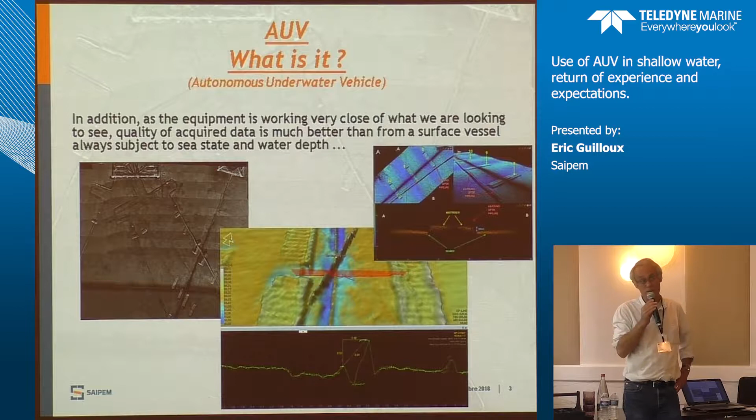First of all, for us, for Saipem, what is an AUV? An AUV is covering the scope of this vessel and this one. Usually for shallow water, for very, very shallow, we are using a small boat, and the biggest one for carrying the smallest one for a little bit deeper. In fact, AUV can cover both areas. In addition, this equipment is working very close from the seabed, meaning we have a higher resolution, a better definition, and high quality of data.

For shallow water up to 200 meters, we make the choice to maximize the use of AUV, and since 4 or 5 years now, we perform several jobs with AUV only, like the Nene project, where we perform pre-lay as-built of about 40 kilometers of line. 40 kilometers of line is only the length of the pipeline, not the length of survey, because we are doing at least 3 lines per pipe. Lichendjili, pre-lay as-built as well, 20 kilometers, MSP2 pre-anchoring survey,

1,500 meter by 1,500 meter area. MSP3 as-laid survey, more than 120 kilometers of line in a very, very difficult area, more than 4 knots current on surface. Offon, as-laid survey, several lines of a few kilometers. We will come back on this project.

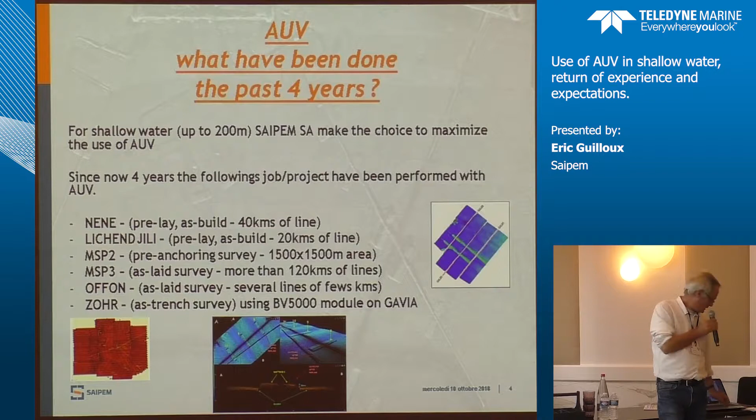On Zohr, we performed an as-trench survey, where we were using the BlueView 5000 module on Gavia mainly. We are also looking for some other projects. Now, in all of our bids, we are including the use of AUV.

As-built survey, it is a typical project that we perform. It was in Nigeria, location of 6 sea lines to survey, scope 27 kilometers of as-built survey, offline. Procedure only AUV, duration 7 days, operational day.

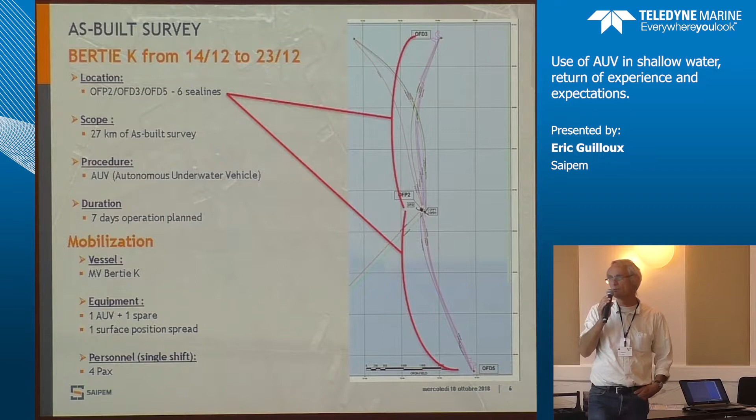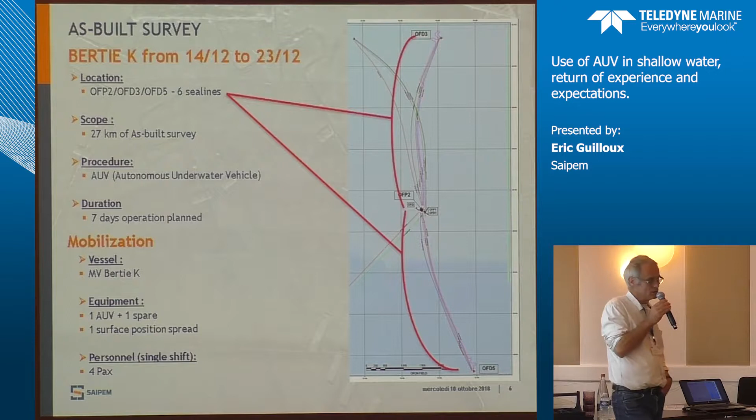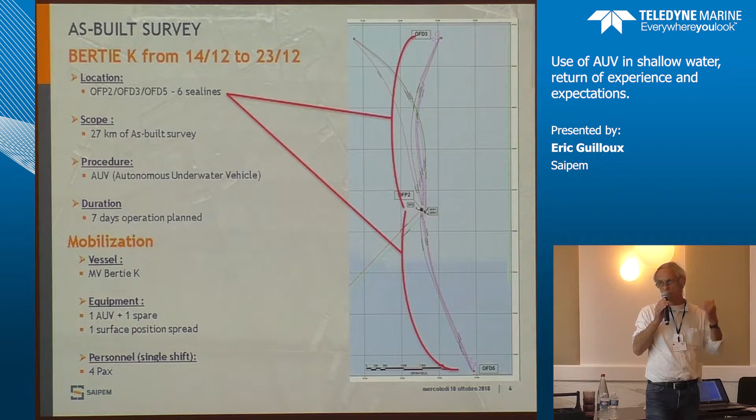Mobilization, this was an opportunity vessel for people knowing, it was an anchor-handling tug. Equipment: 1 AUV, 1 spare, and 1 surface spread. The surface spread is generally very small, 2 GPS, and only 4 people to manage the survey. What we are doing, we are collecting the data offshore. We just perform a QC offshore, and data processing is done onshore.

Challenge. Last project in the operation, okay. Autonomy of survey regarding general operation, hard environmental conditions, means zero visibility.

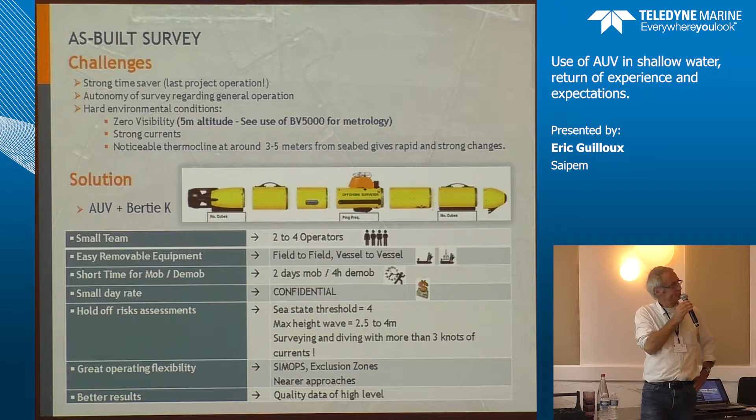For information, we use the BlueView 5000 for metrology on this project. We had 3 metrology surveys to perform, and we use the BlueView. Strong current, yes, up to 4 knots on the surface, and also we sometimes had, for people knowing, soliton waves. It was the worst conditions that we can imagine for jobs. Thermocline, yes, around 3 to 5 meters, very strong.

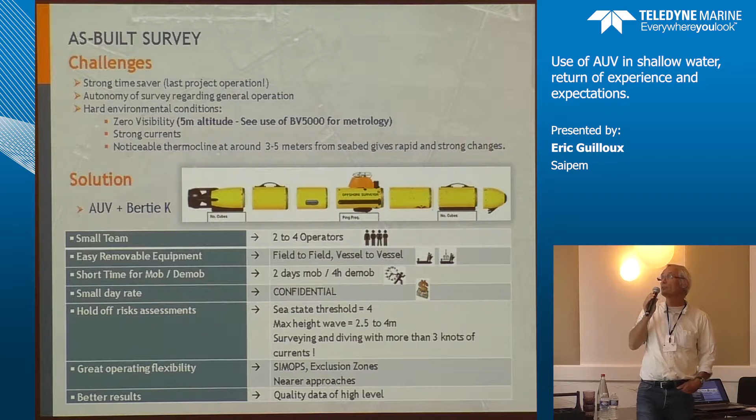So, small team, 2 to 4 operators. We were doing it with 4 operators. Easy removal of equipment, field to field, vessel to vessel. Short time for mob demob, 2 days for mob, 4 hours for demob. Small day rate, I keep it as confidential. Sorry.

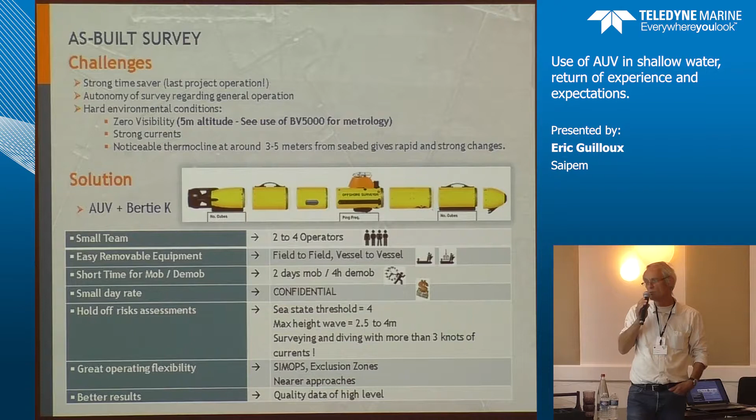Sea state, yes, up to 4. Max wave height 2.5 to 4 meters. Surveying and diving with more than 3 knots of current. SIMOPS exclusion zone, near approach, quality data of high level, yes. We got a lot of very good results on this project.

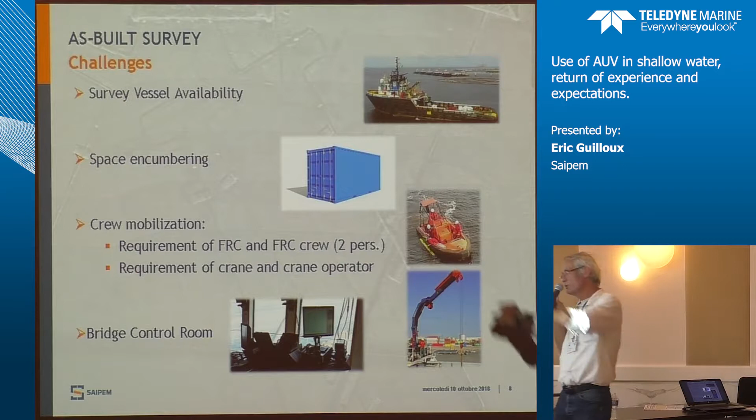As for survey vessel availability, it was the survey vessel that we use. As you can see, it's not a perfect vessel, but it's what we had. Minimum space, yes. Crew mobilization, we require the FRC and FRC crew, two people. Requirement of crane and crane operator, and a small control room on bridge that we installed very quickly.

Okay, if you have some questions, don't hesitate. As-built survey performance, no downtime, and no SIMOPS for the client. You know that around the platform there is a 500 meter hidden area. Advantage of the AUV, we launch the AUV outside the 500 meter area, and it goes to work. It's very, very, very good.

We survey about 10 kilometers a day, and we spent 3 days to complete all the lines. Day shift was only 12 hours a day. Okay, it's the small things. 5-day operation: sea line, approach, and buried section.

Limited transit and deck operation, time wasting, as shown in the following slide. Very high quality of data. It's very, very, very good quality.

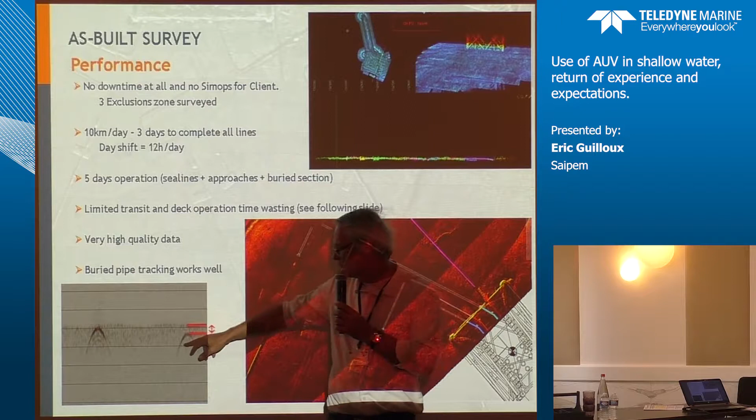Regarding the tracking of buried pipe, okay, we had a lot of pipe which were completely buried after trenching. The goal was to find those pipes. We defined a specific procedure to find the pipe, and we were able to locate exactly and get the right location for each pipe.

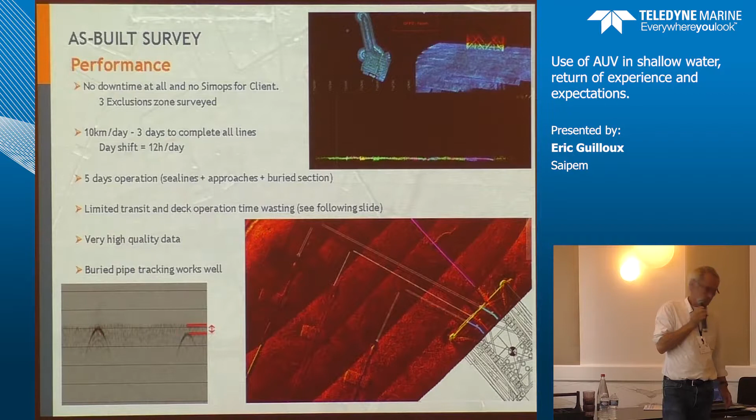Performance - here's some information about what we did on the performance that we had. Operation, transit, ballasting - I don't want to come back on each graph. Day 3, day 2, day 4. All the survey was performed in less than 4 days, more or less, which is a good thing when you know that we had 27 kilometers of line to perform - that's about 100 kilometers of real survey.

It's not nothing when you know that we are working only 12 hours a day for safety reasons. HSE and regulation - we have to put the FRC at sea, and to recover the AUV using the FRC means we cannot exceed that, per company HSE regulation.

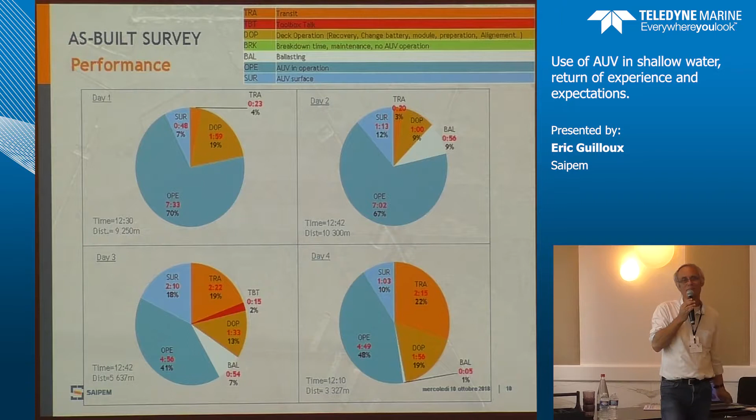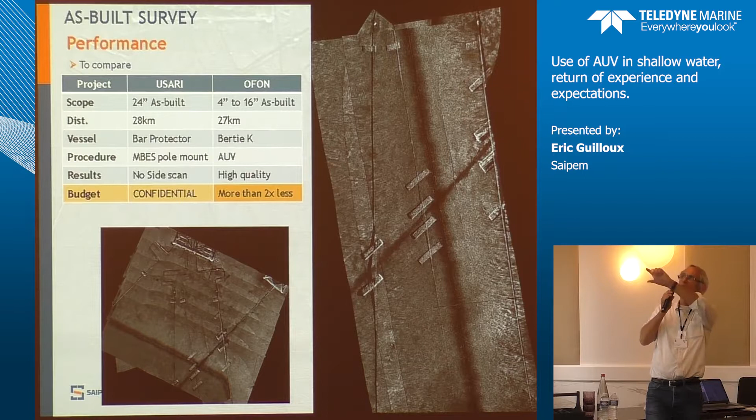For OFON, we used the Bertie K. Bertie K is an anchor handling tug, a very, very small vessel, just a tug. We don't add any pole, any equipment, any external equipment - just the small spread required by the AUV.

Result - try to do a side scan with the DSV and you will see. It's absolutely impossible, especially with the bar protector. We got high quality data with the AUV and multi-beam as well.

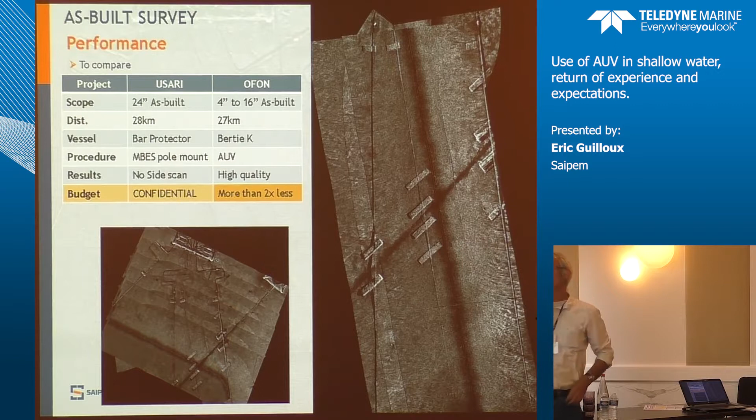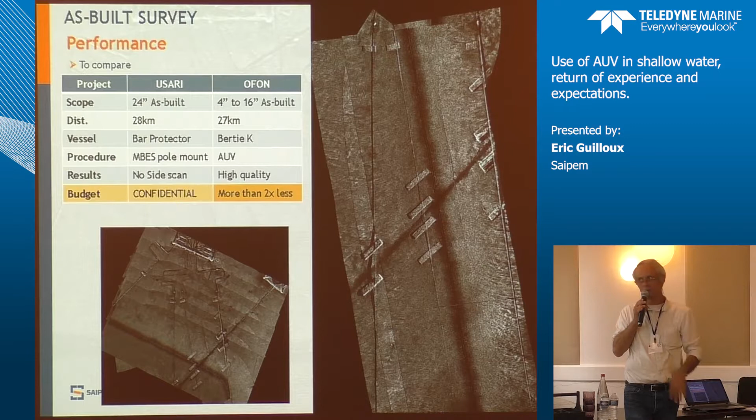Budget - no, sorry, I'm not allowed to give the budget that we had, but more or less, what we did with AUV spread was 2 times less in terms of price. If we compare, the 2 projects are exactly the same, okay, and the budget for the OFON project was 2 times less. We divide the cost by 2.

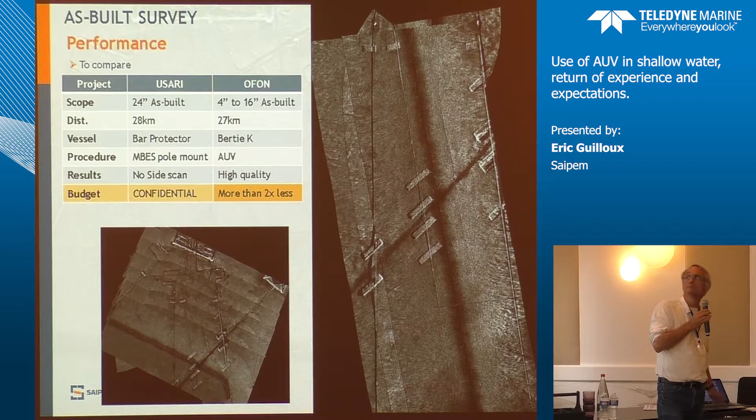As I said, we are not allowed to work at night due to the use of FRC for recovery of the AUV. Corrective action: we tried, and we succeeded in finding a solution with HSE to work day and night, and we had to double the shift.

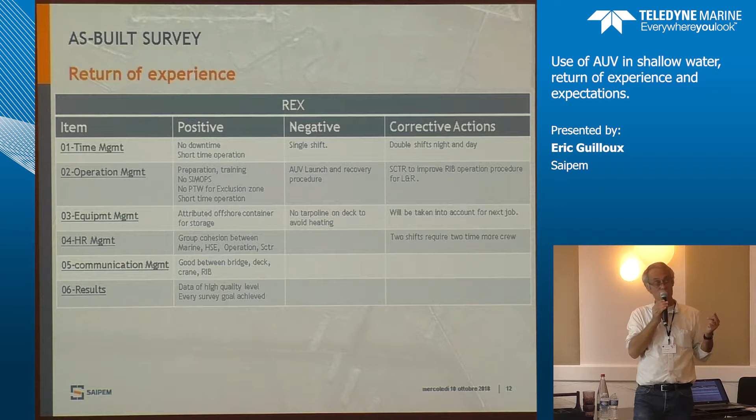Operation management, preparation, training - one important point is no SIMOPS, more or less, no permit to work for exclusion zone. We go straight and we manage. Short time operation - negative: launch and recovery procedure for the AUV, as I said, is always a little bit difficult. The use of the FRC requires managing the crew - 9 crew.

Yes, we improved RIB operation - FRC procedure for launch and recovery. Equipment management: we had one offshore container, and that's it. No tarpaulin on deck, to avoid heating.

This has been taken into account on the jobs that we perform now - good cohesion between marine, HSE and operation, good communication, and high quality data. It's a very important point, as we are very close to what we are looking for, we have very high definition.

Wish and dream - following all the experience that we have, I am passing on some wishes and dreams. First dream: better navigation accuracy. We have to improve the navigation. Navigation of the AUV is based on INS DVL, and there is a drift of at least 0.1% of the traveled distance. That's why we have a specific procedure for the survey.

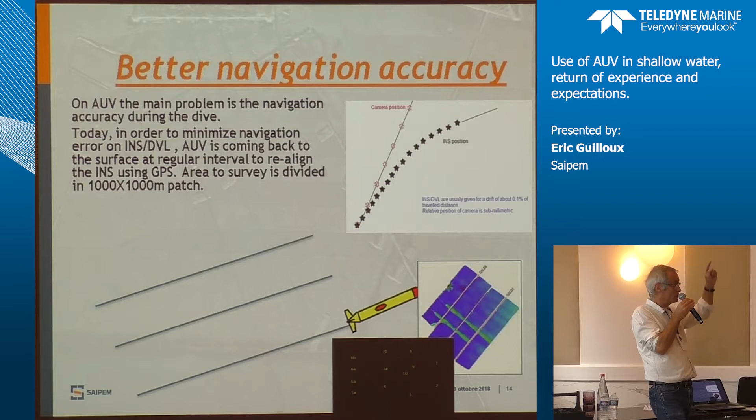But after 80 meters, if you look closely, you start from the surface, you go down. When you are going down, you start to drift with your INS. When you arrive on the seabed, after 80 meters, you are already outside the tolerance. And that's why our limitation today is at 80 meters without any external help.

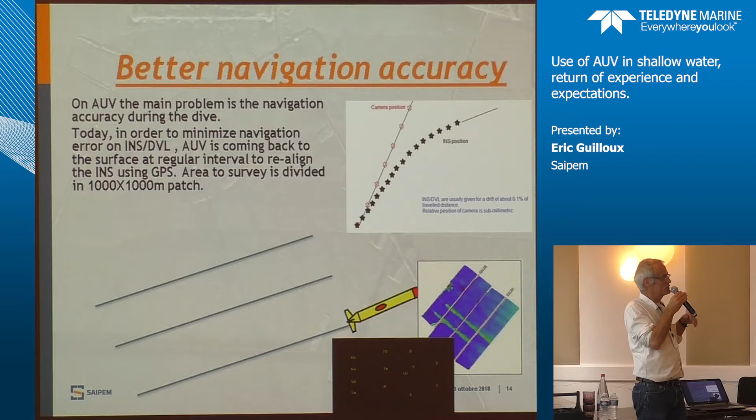One thing we've also done is a lower frequency DVL, so you can have more range to the bottom lock. Could be a solution, yes. It's in your hand.

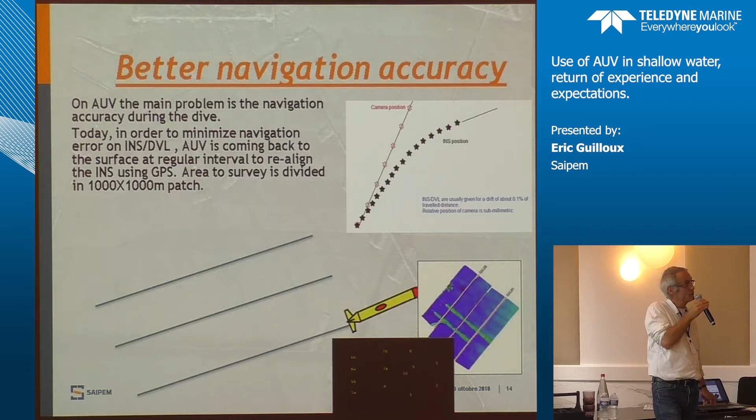Better navigation accuracy, yes. Having a better solution to significantly improve productivity. I made some calculations: if we can make a patch of 3,000 meters instead of 1,000 meters as we do right now, we multiply more or less the productivity by 2.

But we have some ideas. Then, yes, what I'm calling porpoise behavior, snaking above the seabed. This has to be a point, because we already have a very high quality of data. We are trying to get some things always better. It's something that I see on many projects: the AUV is always snaking. We already had a discussion on this.

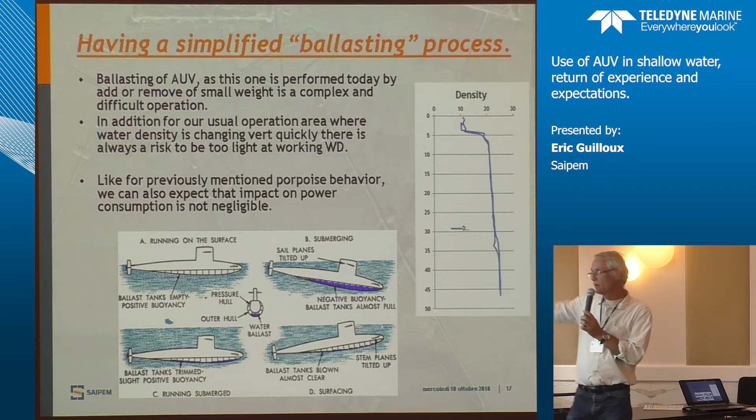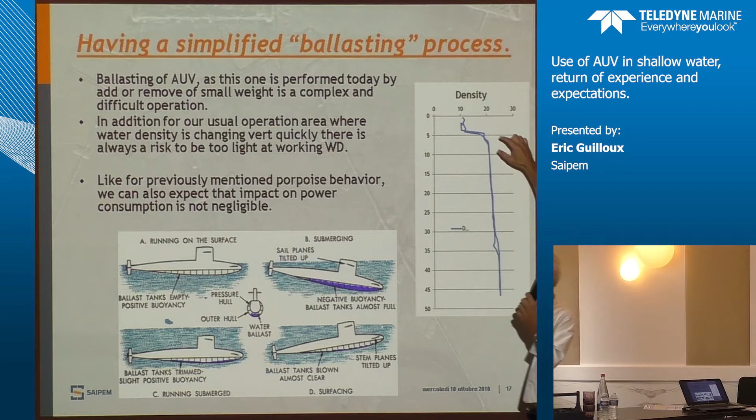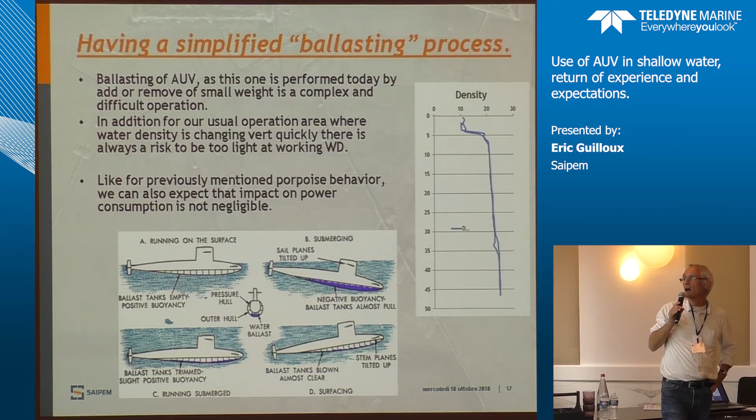Cabinda, typical CTD, SVP. We have a layer - the first layer is fresh water, and then we have the seawater, and the density is very, very changing. This means that ballasting is always a small problem, but we are doing the job.

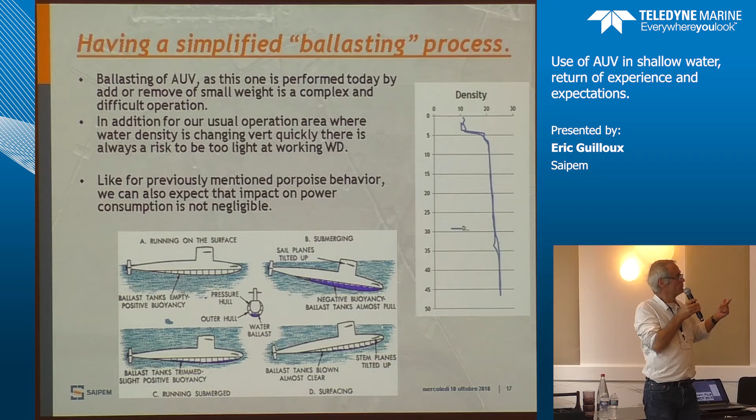Anyway, I think also that as you are always like this or like this, and you are always trying to compensate, you are losing a lot of energy. It's always maybe a way to save some power on the AUV.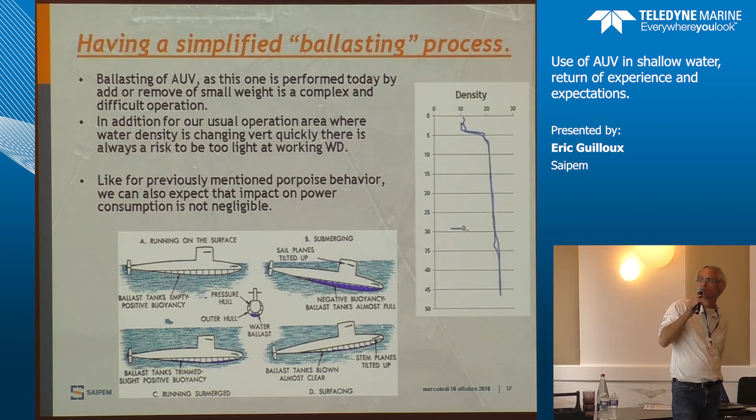For me, my dream is to get something like a submarine - ballast, safety weight, on a front fin. You have that on the bigger AUV.

In conclusion, AUVs are now standard tools for Saipem. We are using AUV, at least for Saipem projects, as soon as we can. It's field proven - when you know where we are working with the AUV, in the Congo River Plume, more than 4 knots current, Nigeria, quite everywhere, all over the world. We have developed specific methodology, specific procedures. For us, it's now fully operational.

I like to know what we have on the seabed. It's a good success for Gavia. Thank you, I think I'm done. Thank you for your attention.